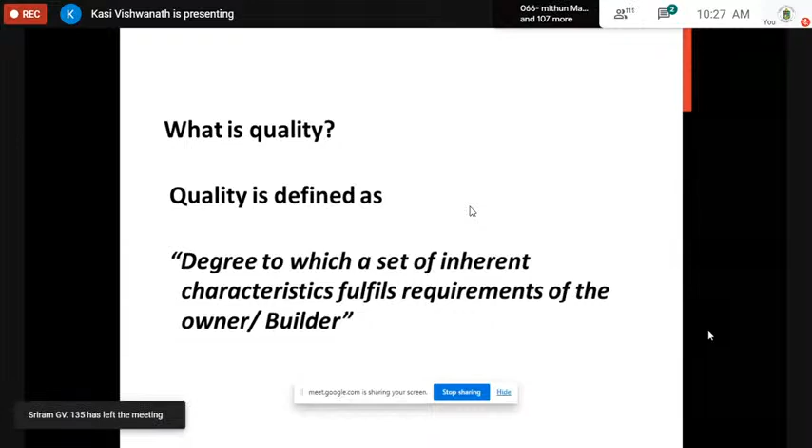Now, what is degree? It refers to the level of satisfaction. If a customer is very happy, the quality is excellent. If he is okay, then it is good. And if he's not happy, obviously it is poor quality of construction. You decide what you want. If you want to make your customer delighted, you need to put in your best.

Now, we were talking about quality assurance. In my introduction, I was telling you something about quality assurance. What is this quality assurance? The whole world is going behind it. As I said, quality control, I will explain what quality control is also. But quality control has gone into the shade now. It has become extinct.

We should not even talk about quality control because it does a post-mortem approach. It just talks about why the failure happened. Why are we concerned about it? Let us not allow a failure to happen. That is the spirit.

Now, what is quality assurance? It gives confidence to the owner, builder, architect. It's a proactive, preventive approach, and it predetermines the failure. Broad spectrum - quality assurance starts from the building materials suppliers till the finish and handover. It applies the quality monitoring system, which we'll discuss in the presentation.

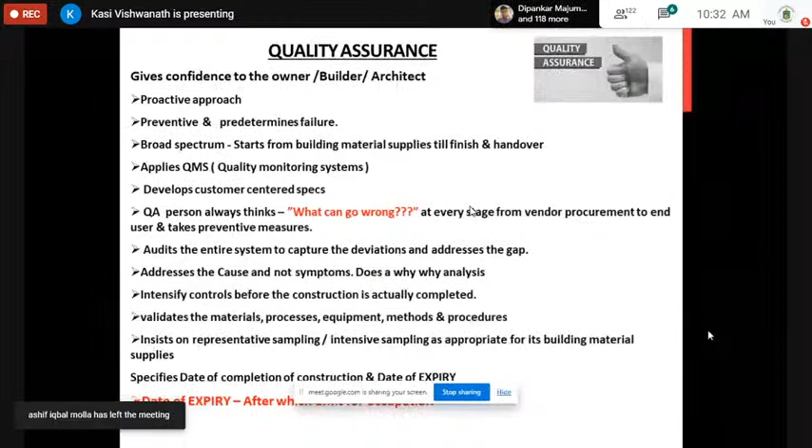It also specifies the date of completion of construction and date of expiry. When we make a medicine in pharmaceuticals, they give the date of manufacturing, they also give a date of expiry. Why can't we do that? Can we give a date of expiry after which the occupant should vacate the building? That is the kind of spirit I expect from our next generation civil engineers.

Now coming to quality control, as I said, they will just test the materials, give the results, and go away. As you can see, Japan has eliminated the QC approach several years back. The routine analysis of building construction materials - they do only the routine analysis, checking whether it is as per the specifications or not, and they maintain records.

It's a very reactive approach. On the other hand, quality assurance has a proactive approach. Quality control has a reactive approach. Quality assurance addresses the cause. Quality control addresses the symptoms - it's too late. QC persons will only report what went wrong. It reports the construction results, not bothered about the completion of the project. They are not bothered about it. They don't foresee the risk.

They'll just construct it, and on that day, if the results are okay, that's all - they don't foresee any risk. That is not the job. We'll test the water - if you say you test the water before construction, they will test it and give the results. If it fails, they'll say, sorry sir, I can't do anything in the field, it has failed, so you replace it with some other water. But where do you go for other water?

We'll test the iron quality used for construction - the strength and all - and then they'll give you the results. And in between, what happens is the supplier will give good iron quality, and the next lot may not be of that standard. And that is how big foundations all collapse. Now we test the quality of concrete - they will say, I have used this particular standard, but who knows whether that standard will serve the intended purpose or not.

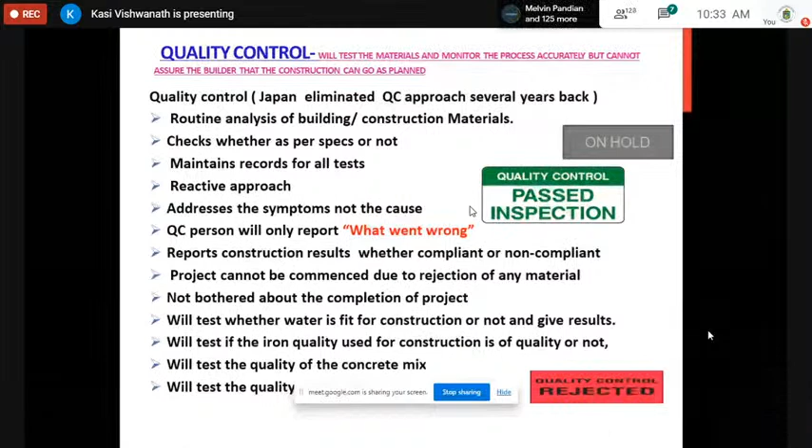Now coming to this quality management system, called QMS, I was talking about ISO 9001:2015, which many world-class construction companies like Hindustan Construction and Larsen & Toubro are all certified to. What does the standard say? The standard clearly says you need to have quality assurance. That is right, that is fine.

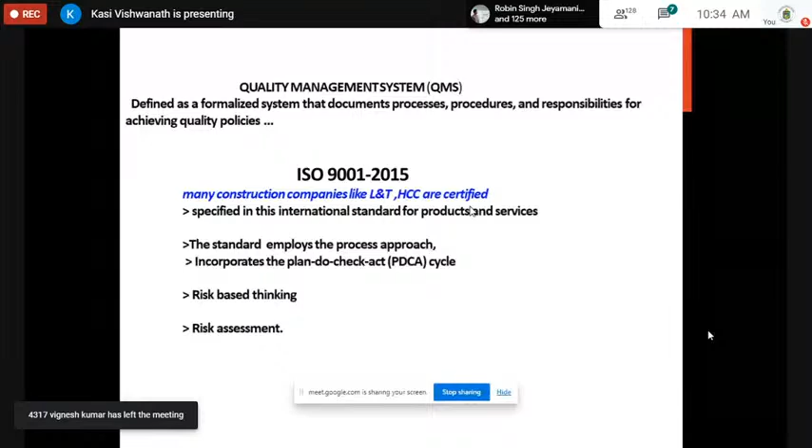But you also need to have risk-based thinking - a risk assessment needs to be done. Now, quality assurance assesses the risk from start to finish. As I said, sitting in a room with their experts, they do a brainstorming. From start to finish - raw building materials to the final construction - the criticality in the construction process, the probable occurrence of various failures, the current detection levels - they are all worked out with the entire team to evaluate what can go wrong. That is the philosophy.

Quality assurance will simply keep talking about this - what can go wrong in every step of the construction. And they keep on taking preventive measures, not corrective measures.

It's only preventive measures. And who can do it? It is not written in any books. You will not find quality assurance in any of the civil engineering syllabus or in any of your books or standards. It is just an experience.

All experts sit together, right from the workman, construction workman, to the top man. They do a brainstorming on what can go wrong in the foundation, what can go wrong in the entire process, not just now but even several years later.

So quality assurance is a greater accountability, assuring that the required building would be constructed as per the customer requirement and handed over in time. Quality assurance needs to be highly proactive and do a thorough risk analysis, and they should understand how to do that.

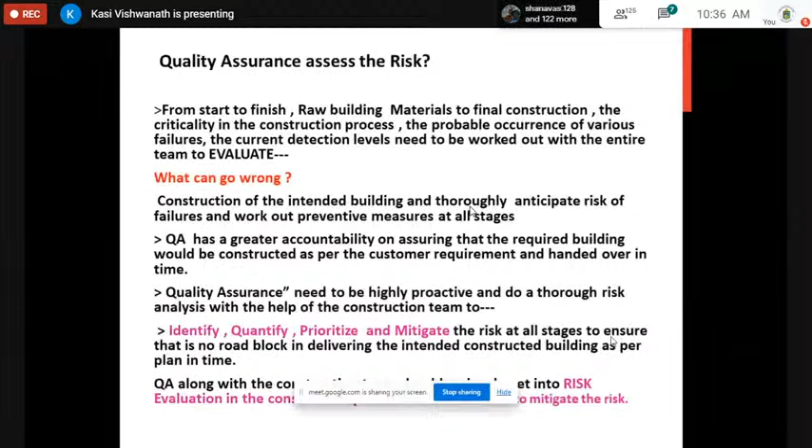What is the concept of quality assurance? As I have already explained, it is preventing mistakes. There's no use crying after the building collapses. They don't permit that. Everything is done even before the project is commenced - preventing mistakes and defects, foreseeing the risk involved in construction operations.

Quality in a construction process, how? The planned and systematic activities implemented in a quality system so that quality requirements for the construction and its completion will be fulfilled. That is their objective - to ensure all quality requirements for the construction and its completion are fulfilled.

QA services are primarily used by owners and developers. The owners use QA services to evaluate how a contractor is achieving specified conditions and design standards. QA is either measured before a project begins or while a building is undergoing construction. QA has no role after the construction is complete.

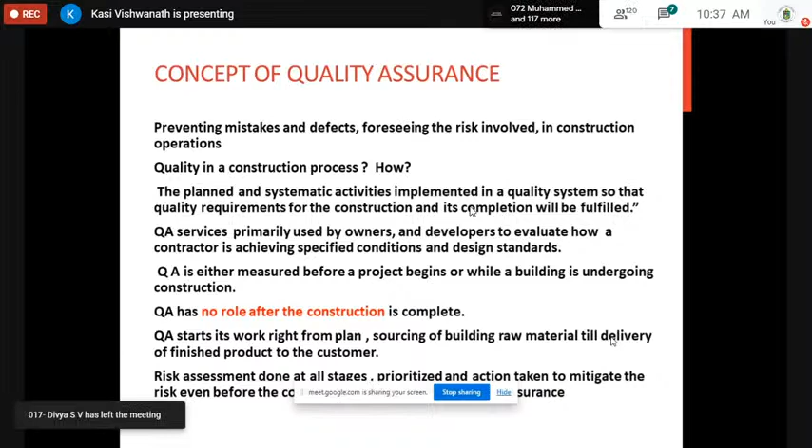Quality assurance starts its work right from planning, sourcing of building raw materials, till the delivery of the finished product or the delivery of the constructed house to the customer. A risk assessment is done at all stages.

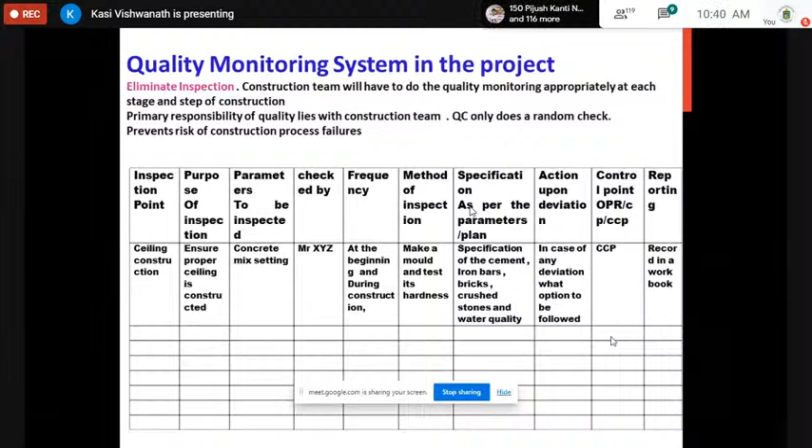Now, what is the key to quality assurance? Be proactive and conduct a risk evaluation through failure mode effect analysis. We were talking about how to evaluate the risk. There's a beautiful table called FMEA.

The whole world does it. In fact, for the Mangalyaan, our unmanned spacecraft that landed on Mars, when it successfully landed, the director of the space agency came out and said we were very successful because we did a lot of failure mode effect analysis. So to that extent, it has got a very high significance. Why not you all learn?

I even, during my discussion with Professor Gokul sir, told him that we'll conduct a workshop in your institution, and actually do a workshop with failure mode effect analysis for any construction work, for any project work. You will see it will be done with your help. You all will be there, and we'll conduct a workshop which will be very useful for you, and you can do the same thing when you're employed elsewhere.

QA always works on what can go wrong, I've already told about it. The risk is evaluated at all steps, starting from the design to finish. Even before the starting of the project, the risk is identified based on severity.

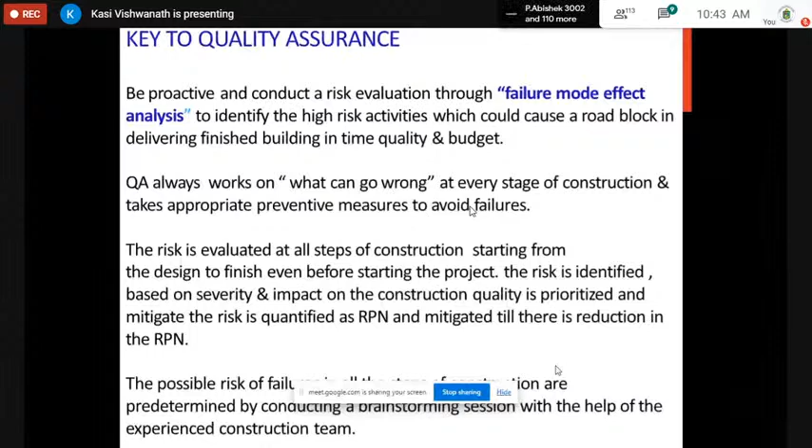Now, I was talking about disasters. Let us also have a look at this: 10 of the most shocking construction failures in the world. The root cause was determined after the damage was done. No use. These causes, what you're going to see now on the presentation, could have been captured during the risk analysis. But risk analysis was not done.

For example, in Quebec City Bridge in 1907, it collapsed because the main cantilever collapsed. Chicago Crib Fire, January 1909, it collapsed because a temporary dormitory crib constructed of wood and brick caught fire. St. Francis Dam, March 1928, collapsed because defective foundations, not the dam design, were to blame for the collapse.

Banqiao reservoir dam in 1975 collapsed, caused by failure of the dam's sluice gate during typhoon Nina, wrongly designed without proper validation. My goodness. Hurricane Katrina, you all know about it. New Orleans levee system, August 2005, collapsed because it was installed at a depth of 17 feet instead of the initially suggested depth of 31 to 46 feet. Who did the risk analysis?

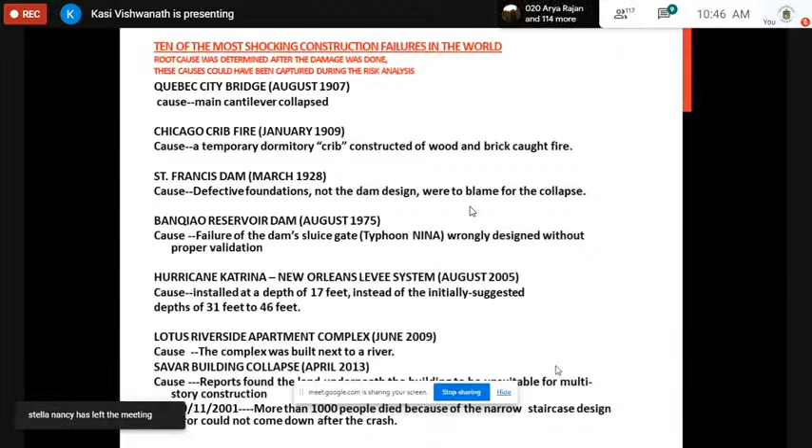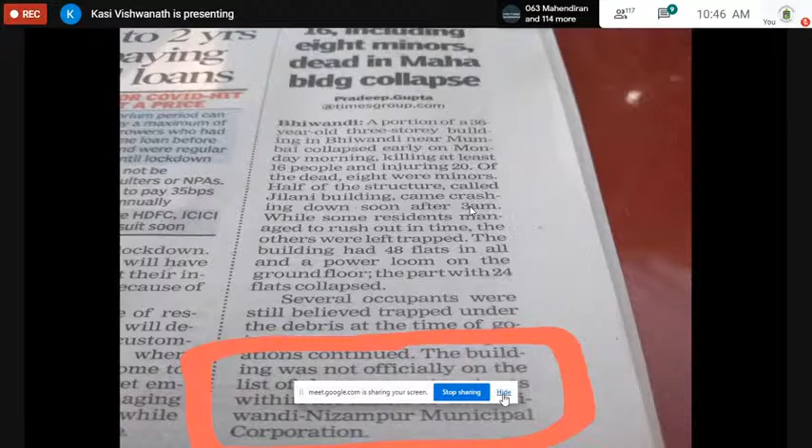Recently, this week, in Maharashtra, a building collapsed. The building was not officially on the list of danger, not declared as a dangerous or risk-prone building. It was not officially on the list of dangerous structures within the limits of the Bhiwandi Nizampur Municipal Corporation. Why has this happened?

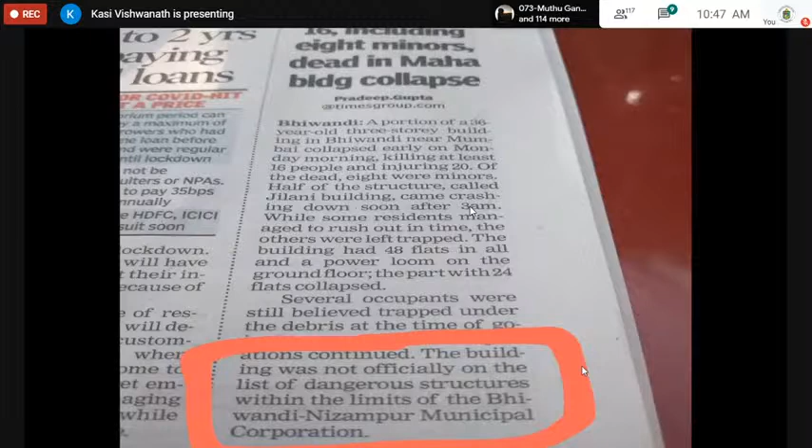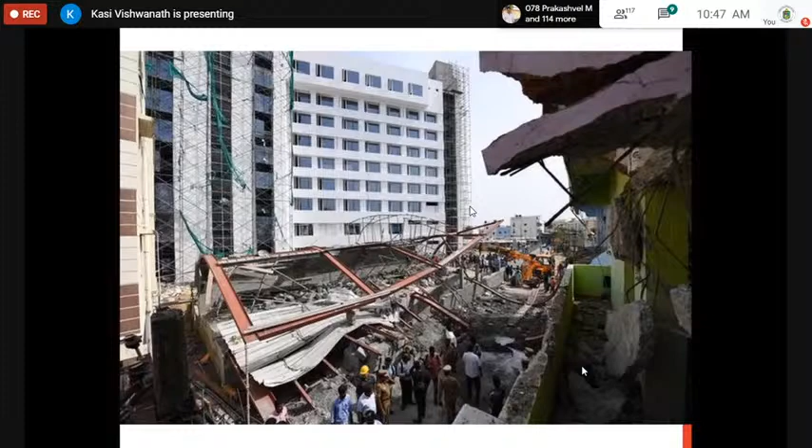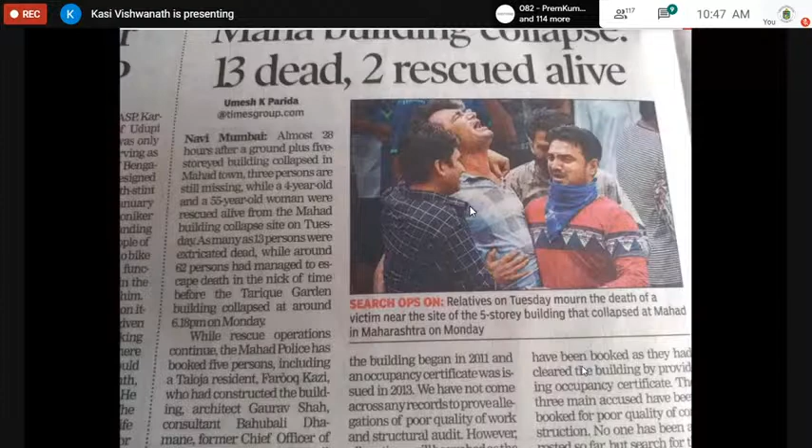We have got a good syllabus, top engineering colleges. We learned a lot of civil engineering techniques, we get gold medals. But what happens when these kinds of incidents happen?

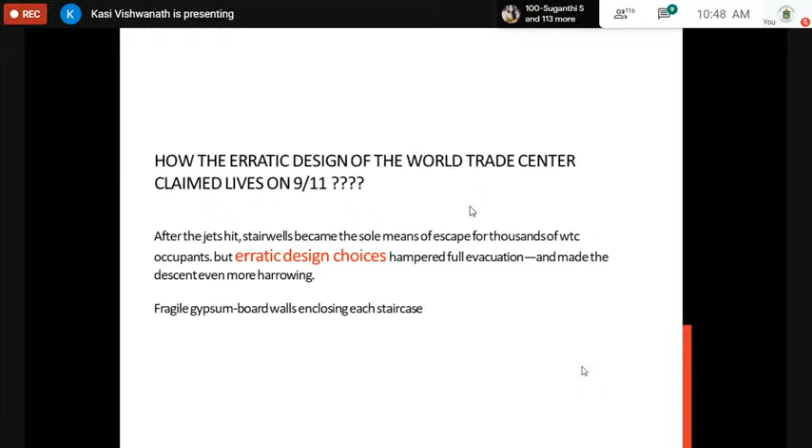I was just telling about the World Trade Center. After the jets hit, stairwells became the sole means of escape for thousands of occupants, but erratic design choices were the issue. They did a root cause analysis and found this was the reason. Had they made the staircase a little wider, as per the design, we could have saved at least 1,000 people.

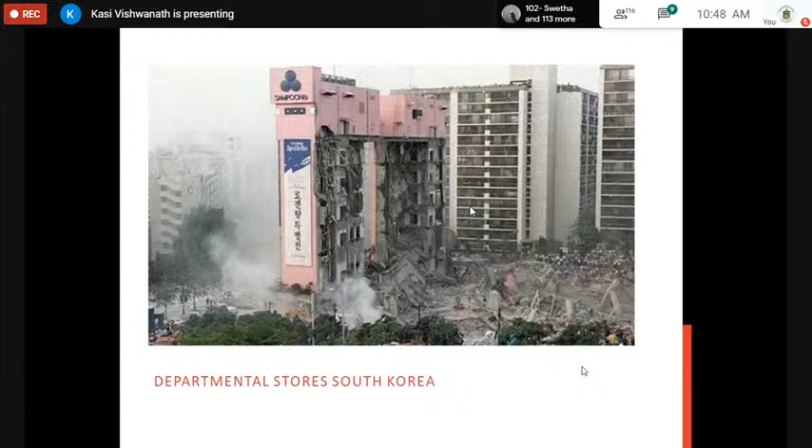This is the departmental store in South Korea - it's all poor construction, nothing else. Now let us look at how to evaluate the risk.

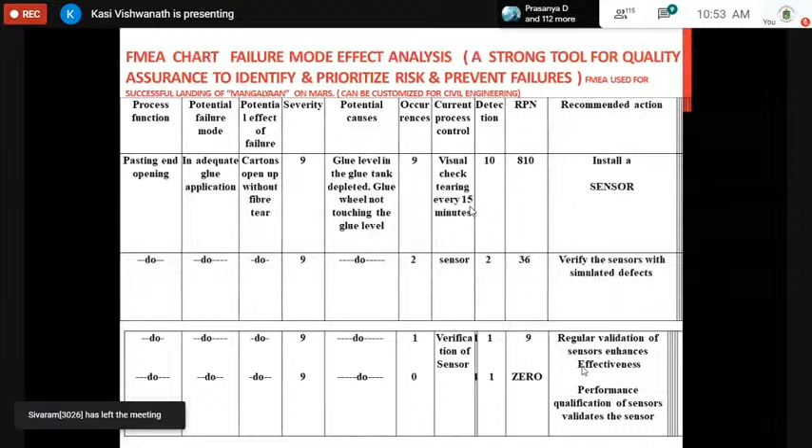So all I'm trying to say is there are a lot of beautiful methods to ensure that nothing goes wrong, no failures. Why not we learn all that? Failure mode, as I've already explained, is a tool to identify, quantify, and prioritize the risk within a process before constructing and building, and then track actions to mitigate the risk.

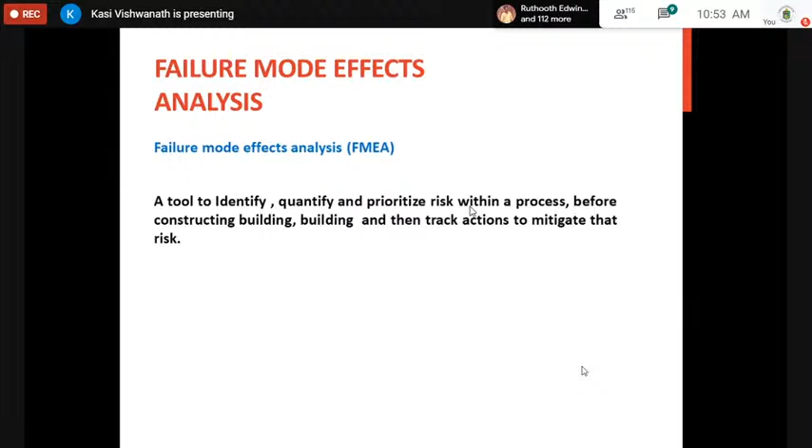Now, having said all that, let me spend a minute on what is Six Sigma. Six Sigma, getting a master black belt. If you, with all your valuable BE and ME degrees in civil engineering, learn about Six Sigma, your value is appreciated 100 times. Why 100 times? 1,000 times. If you say I'm a BE or ME with a Six Sigma black belt, you see how much your value gets appreciated.

I don't say your B.Tech, BE, or ME aren't valuable. They are basics, a must. But this will keep you on the launching pad. You are sitting in a rocket to go up, and you go into space.

So what is there in Six Sigma? Six Sigma helps you in problem solving. The efficiency is 99.9999%. If a company is working on a Six Sigma philosophy, it permits only 3.4 defects per million opportunities. If we have done a million activities, there could be only 3.4 defects.

That's it. Now we are talking about Lean Sigma. Lean Sigma is also very valuable. Just like Six Sigma, there's a Lean Sigma, which simply reduces the cost of production, cost of manufacturing. It reduces the waste. So what happens? You are able to give a better product economically to the customer. There won't be any wastage. The company will be able to manufacture the product without any non-value addition, without wastage, without producing defects. That is the beauty of Lean Sigma.

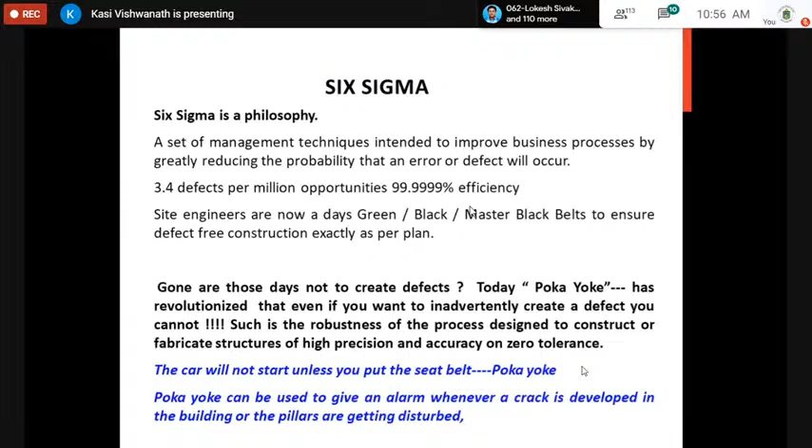So I have already explained the FMEA part of it. In construction safety management, for the process of construction activities, how to do the FMEA is very simple. You first list down all the activities from A to Z, from foundation till the end. In one foundation itself, a team did brainstorming and found 181 activities, actually 180 steps in the foundation itself, including sub-steps. List them all.

Work on the severity, what impact it will have on the finished building. Work and also find out the possible occurrence - if there is a failure in this particular activity, what is the possibility of the failure occurring? And also list out how strong are your detection controls. Is it manual, or is it left to good luck? Or have you got a system?

If your foundation is crumbling and giving a small shake-up, are you getting some signals? Have you got a small device which will find out something is going wrong in the foundation? Even after 25, 30, even 50 years after the building has been erected, you should have a system to give a beep sound - yes, the strength of the construction, the foundation is getting weaker and there are cracks developing.

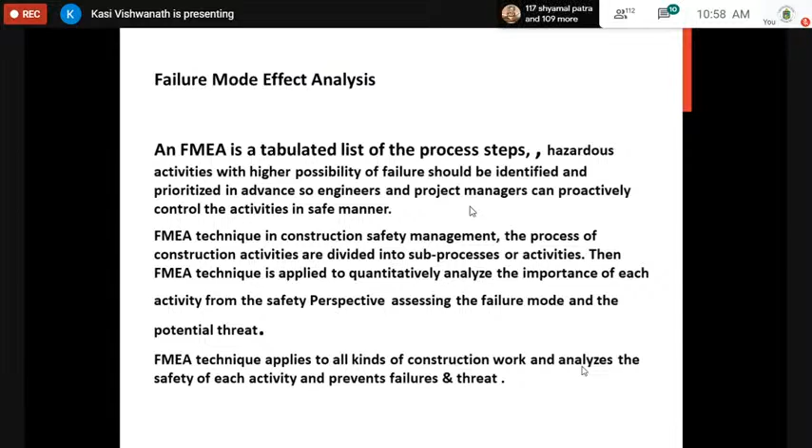So all this is nothing but you are foreseeing the risk and putting the preventive measures in place. We can work on it. I promise you, in a small workshop, whenever the pandemic situation eases out, I'm sure I'll help you out.

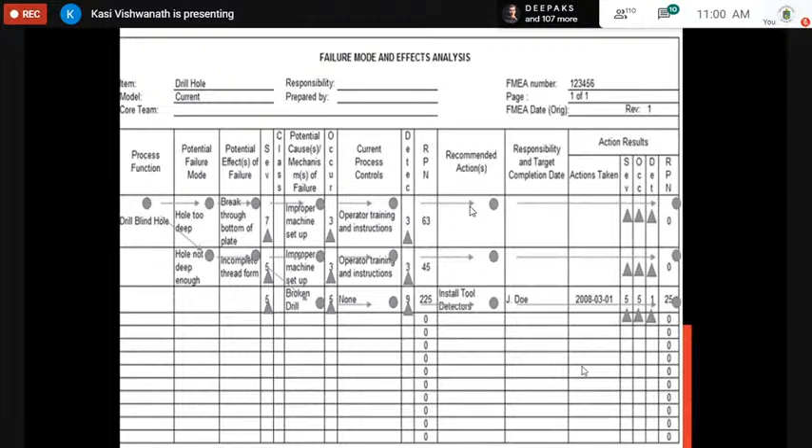This is the objective of failure mode effect analysis: keep on reducing the risk till it comes to zero. But a good risk level is, if it's below 50, the whole world accepts it. There's not much danger if the risk number comes below 50.

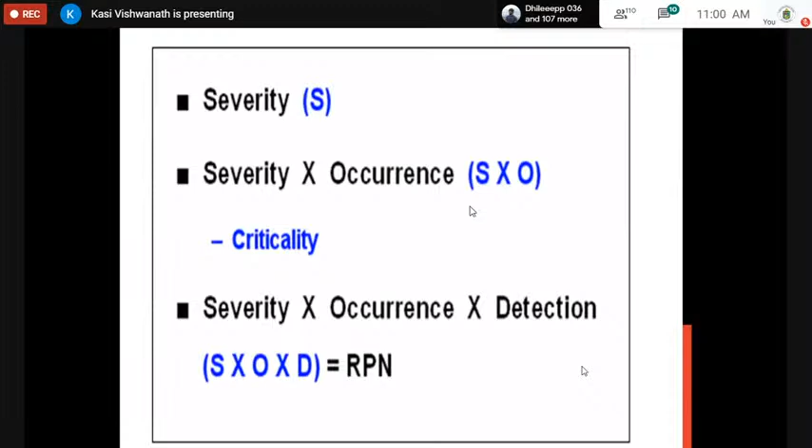Now this is just a template, I have already told you this. The severity into occurrence is equal to criticality. The severity into occurrence into detection gives the risk priority number. I've already explained the failure mode effect analysis.

If you look at it, the highest risk is 1000 RPN. The highest risk - if your FMEA, failure mode effect analysis, shows 1000 - that means there's a disaster. You have to immediately attack on it.

Above 500, there's a very high risk. The moderate risk is around 250 to 300, and the low risk is 40, and zero defect is no risk at all - the spaceship can take off. Normally for rockets, they go for zero defect. Only unless there is zero risk does the countdown start.

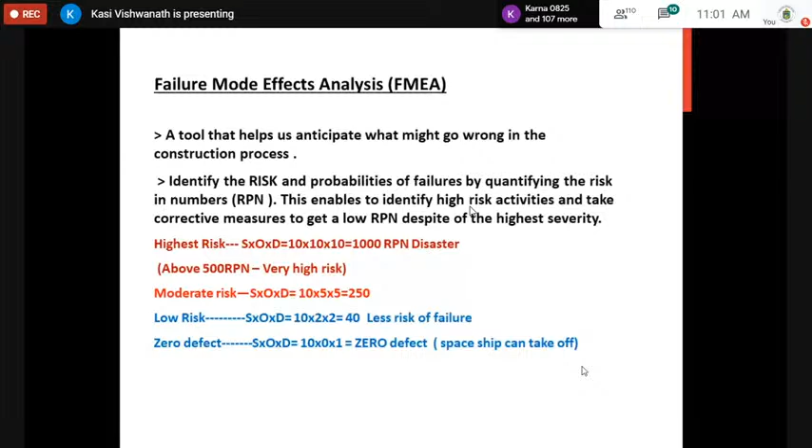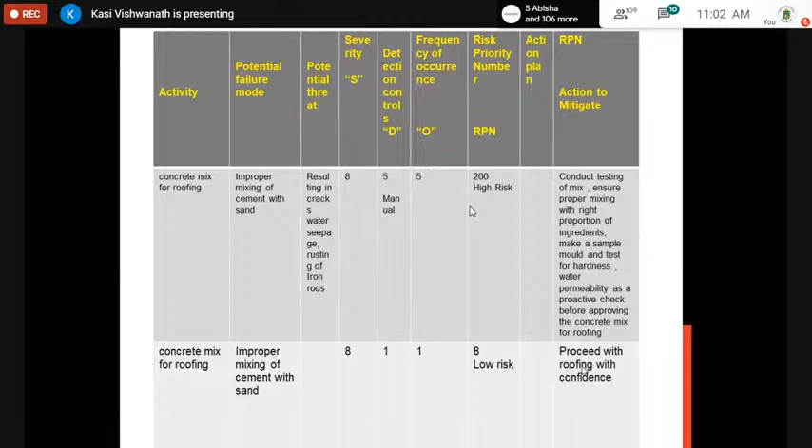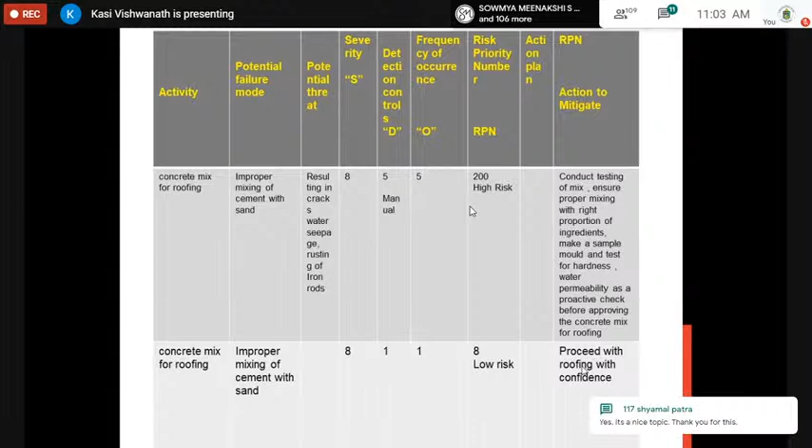So your detection controls, you worked on it to ensure that this will not give away. The mix will be perfect as per the plan, and the occurrences have also come down. The risk from 200 has come down to 8. You can proceed with confidence.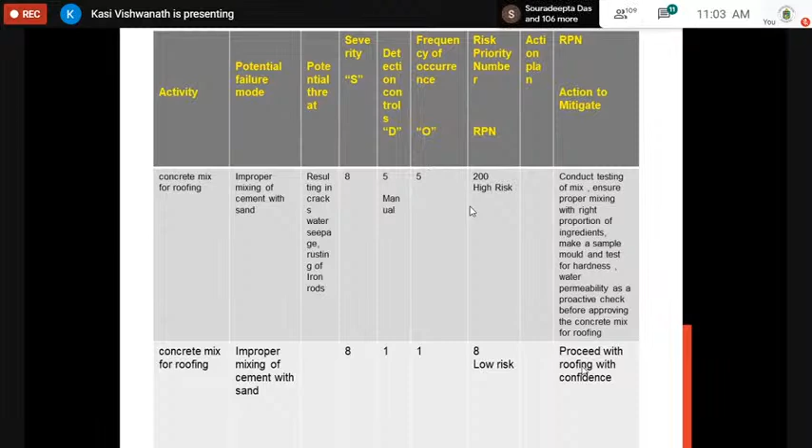This is the thumb rule I've already explained, because time is a factor. As I said, these are all the severity levels: very low, moderate, high. This is a rating on a scale of 1 to 10. If your severity is very low, you give a number of 1. If moderate, give 5. If very high, you can give 10.

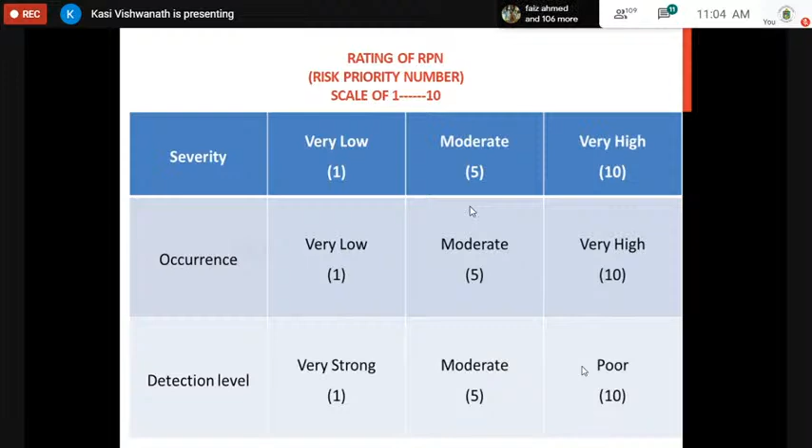Occurrence, same thing: very low, moderate, and high. If it's high, you give 10. If very low, give 1. Detection level, again, if the risk is low, your detections are strong, and risk is low, you give 1. If you don't have a proper detection level, only manual, then risk is high, so it becomes 10. So this is the rating.

As I said earlier, the success of the Mangalyan satellite is due to the extensive FMEA carried out before the launch. The root cause for any problem is always in the 5 M's.

Any cause for any disaster is because of the 5 M's. One is material related, or method related, or machine related, or man related, or mother nature related. You need to have a complete plan and think about all these 5 M's, because these are the 5 M's which contribute to failures: man related, material related, method related, machine related, or mother nature.

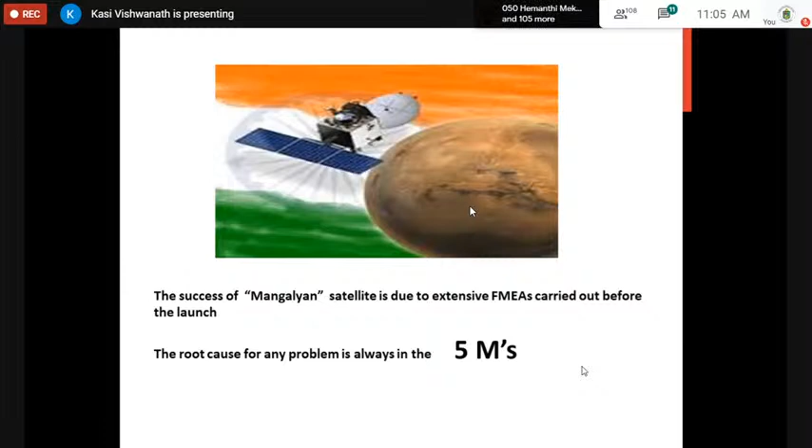Now, why good construction practices? I don't have to spend much time, you are masters in this. You have got very good professors and a beautiful institution to teach all that. But still, I'll go through the best construction practices.

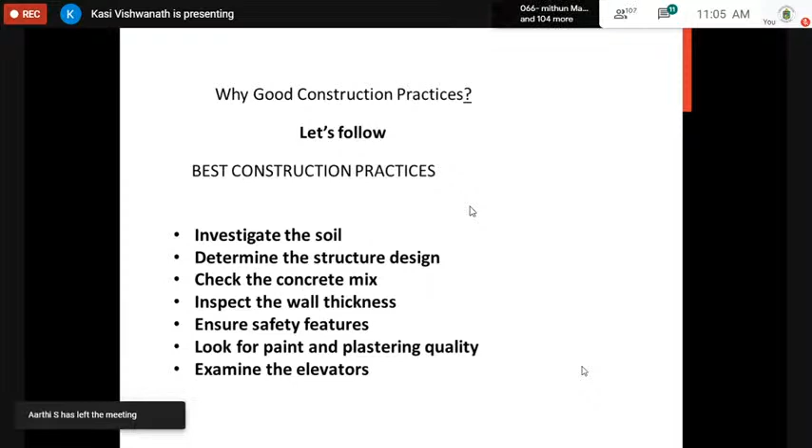Investigate the soil, determine the structure design, check the concrete mix, inspect the wall thickness, ensure safety features, look for paint and plastering quality, examine the elevators. These are the good construction objectives to prevent or eliminate error at each stage of construction. I'm only talking about failures. We have done a lot of good constructions and they have collapsed also.

Now there's a small shift. We are trying to change our thought process. You need to prevent and eliminate an error by foreseeing the risk. So identify the possible risk and potential threat on the constructed building or bridge, to take all necessary precautions to ensure that we construct buildings of the required high quality and safety, to reduce disorder in the system of construction, to show concern for the constructed building and the people, and to develop leadership qualities with an attitude for quality.

Whenever you do a brainstorming, you should have everyone, right from the labor to the top project head, all of them should be there to do a brainstorming. We don't know, you may get a golden idea from the man who is carrying the bricks.

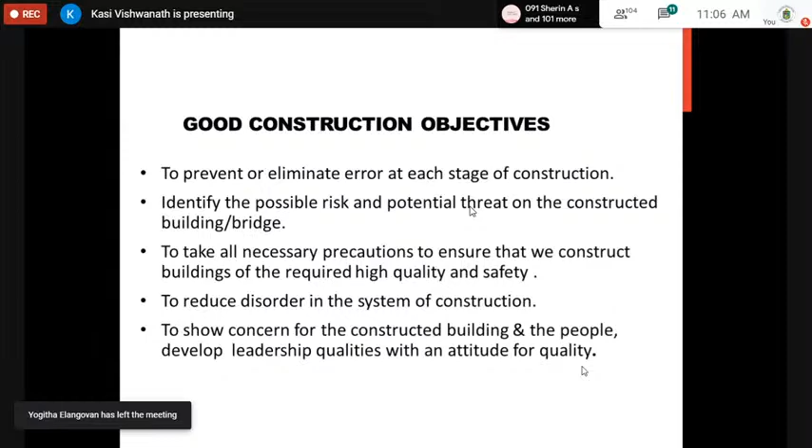International standards: these are international standards, the American Society for Testing and Materials. I hope you're aware of this. Euro codes, IS codes, BS codes. These codes describe details of standard methods of testing, procedures, and methods of concrete masonry.

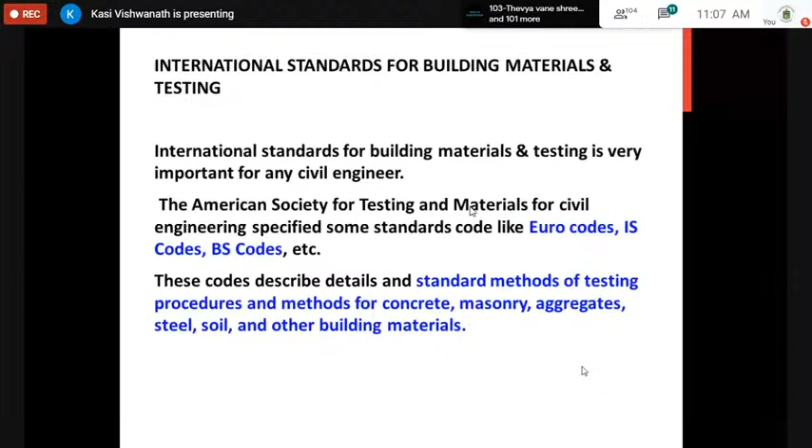But all this is fine, you need to find out. You don't want the best material, you want an appropriate material for the intended purpose. I don't need the best material, the world's best material. I only need material which will serve my purpose, where the buildings can be safe and it will stand for the number of years what you have planned.

So some of the standards: ASTM, Canadian standards, European standards, British standards, Indian standards. Now all these standards are going for risk evaluation. Please understand, all these standards, they want risk evaluation to be done. That is the reason why I'm focusing on this.

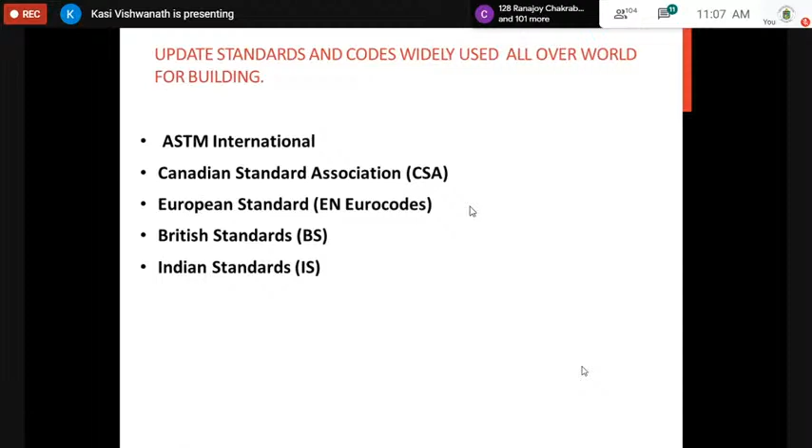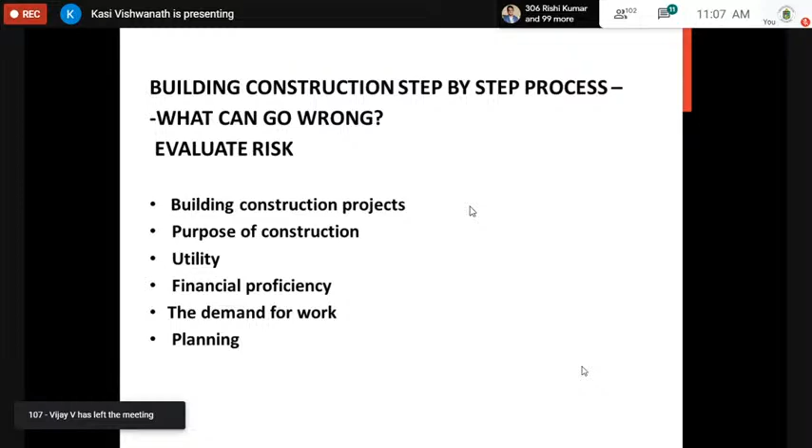Building construction, step-by-step process: what can go wrong? Evaluate the risk. Building construction project: purpose of construction, utility, financial proficiency, the demand for work, planning. What can go wrong? You need to apply your quality assurance and risk evaluation.

They check cement, best for house construction. You are not checking the best of quality, best of the grade, or from a very good manufacturing company. You need to check whether it is the best for the house construction.

For calculations, you all know about it, you are civil engineers. The total load on the columns, beam, slab - we must know about various loads coming on the column. You need to verify. Generally, column, beam, and slab arrangement is seen in the frame type of structures.

Load is transferred slab to beam, beam to column, and ultimately reaching the foundation of the building. All that I need not say, because I know you

learn all that from your gurus, from your books, from your beautiful syllabus. We have got a beautiful engineering college here, and our syllabus is one of the best in the world. Only thing is, they need to be a little quality focused. That is my request.

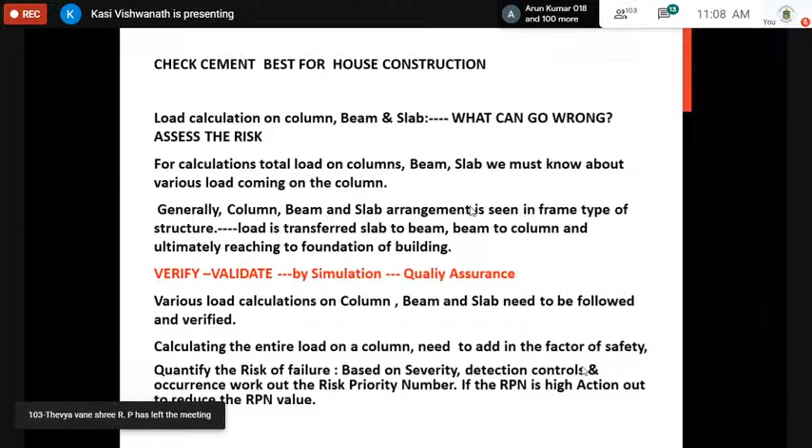Quantify the risk level and all that I have already discussed. We are quickly going ahead. Now, which is the most appropriate cement for house construction, for your type of house construction, depending upon your locality where the house is going to be constructed. Not the best, but what is appropriate.

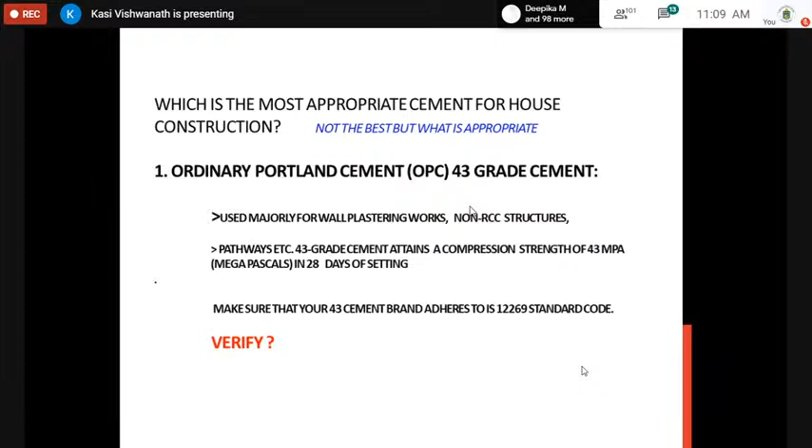OPC 43 grade cement, it might be the best, but whether it is serving your purpose, you need to prove it. You need to verify before you use that. Or it is OPC instant plugging mortars. You all know about the characteristics, that they are for fast-paced construction in which the initial strength needs to be achieved very quickly. Validate it, no.

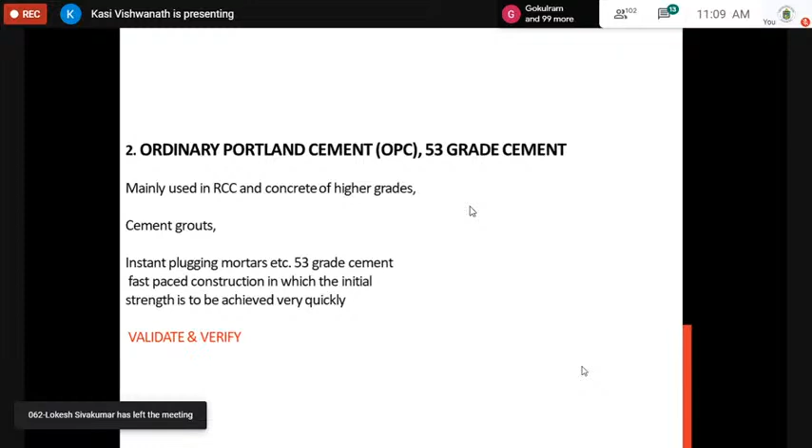You need to make a sample to verify whether the initial strength is achieved where you want it, whether it is really achieving that initial strength very quickly. You need to verify and validate before you use materials like this. And if you don't verify, you will face disaster.

The same thing with this, Portland slag cement, same thing. Excellent corrosion resistance might be claimed. Do it, find out whether it really serves the purpose. Who knows? The slag cement you're going to get may not have all these characteristics. Make a sample, test it, ensure that it has got the right kind of

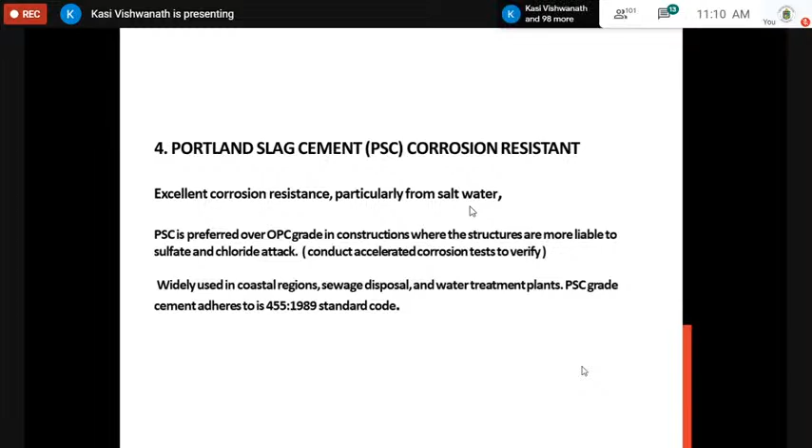characteristics before you use it to avoid failures. No failures. If at all you feel there is a failure, cut open and find out where the failure can happen and take preventive measures. Don't leave it just like that. The same thing with white cement.

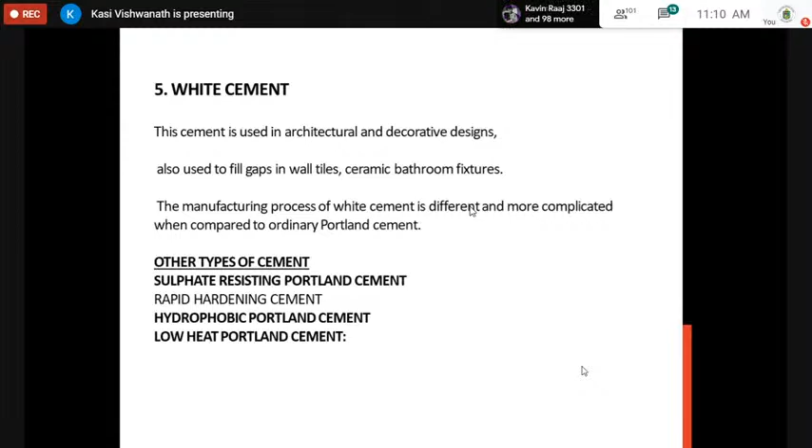Where you should evaluate the risk - suppose you have got some set of labor and they stop coming. Will you stop construction? Will you get new labor? Who knows whether they'll work to your satisfaction or not?

My dear friends, everywhere you have to foresee the risk. If you don't foresee the risk and you keep on working mechanically, the result is going to be very dangerous. It's going to be a disaster.

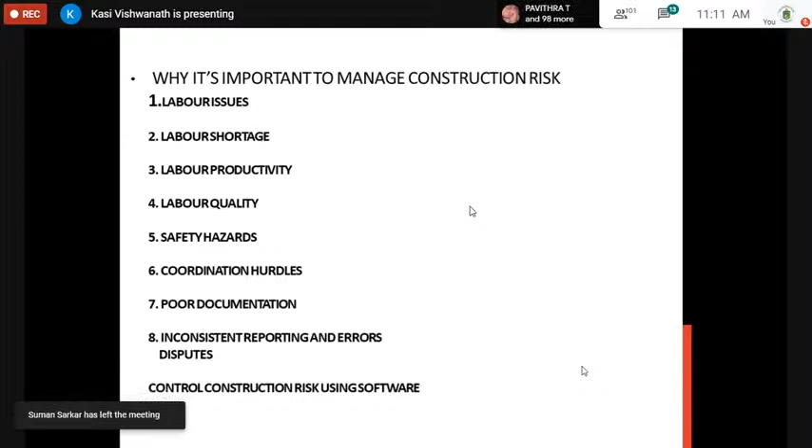Think for a while, call for a brainstorming, call all the people and try to analyze and foresee what risk we could face in soil testing and report analysis, or while demolition of the old structure. You are the right person. You need to think about it and take preventive measures.

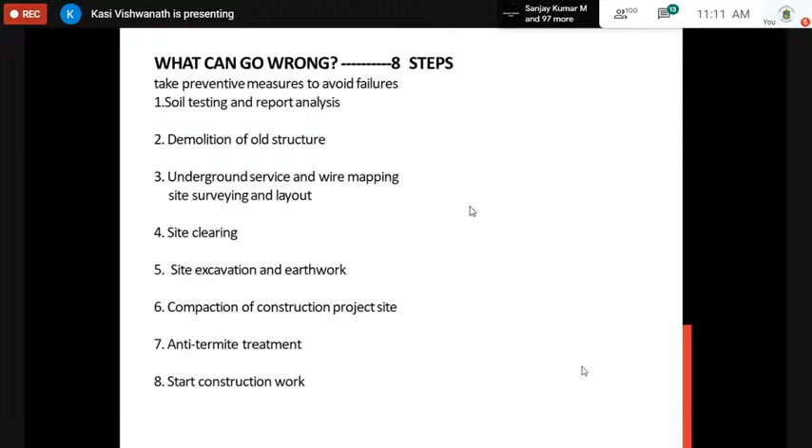Soil testing and report analysis - analyze what can go wrong. What can go wrong, not what went wrong. Don't do that, it's a sheer waste. If you start talking about what went wrong, it is just like doing a postmortem.

Soil testing is essential before planning and designing any construction project. Without knowing the properties of the soil, we cannot design any structure. Soil geotechnical investigation is carried out. You need to find out what is the risk. If you feel that there is no risk, go ahead.

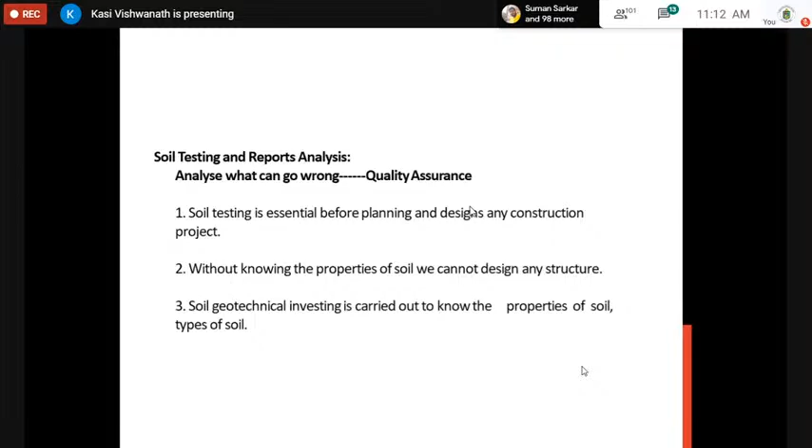Demolition of old structure, what can happen? What can go wrong? The demolition of old structure is important in construction site preparation work. Prepare a plan to demolish the old structure with the help of a demolition team. Demolition planning must identify which structure on the site needs to be demolished. Structures on site which require repairs versus demolition - you need to differentiate. Systematic planning, identify hazards, ensure safe disposal of materials, comply with legislation requirements.

Your building is half done, and there might be a roadblock by the legislation committee. You need to be very careful. You should not take any risk in that aspect.

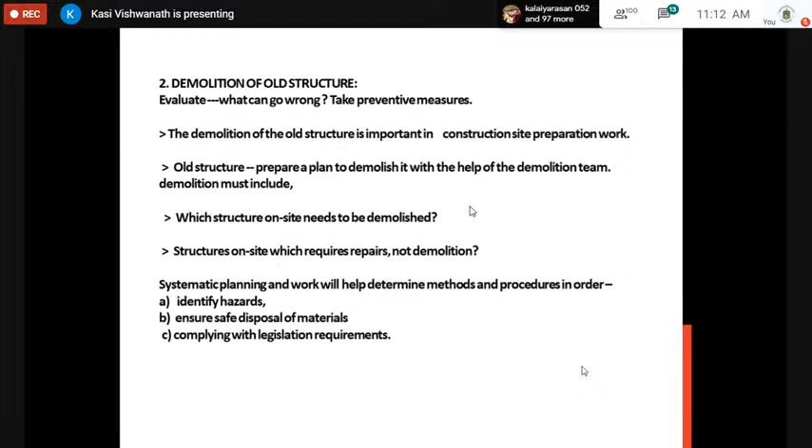The site clearing, same thing. Something might go wrong, so you have to remove any underground wood, underbrush, trees, rocks to a distance. All this is very important. And this does not need any standard, does not need a BE or ME degree, or a doctorate degree for it. It's all brainstorming. Call all the people, sit together and brainstorm about what can go wrong, foresee the risk, and take action.

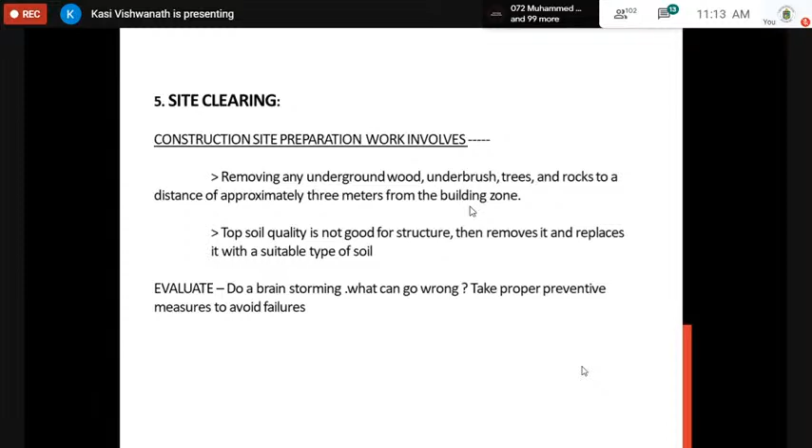Do a brainstorming. Site excavation and earthwork, same thing. Distance the soil. You are the best man, but we don't know what can happen. Call the people, call the nearby surrounding people and think, apply, not one man. When 25, 30 people all sit together and brainstorm, I'm sure the result would be excellent.

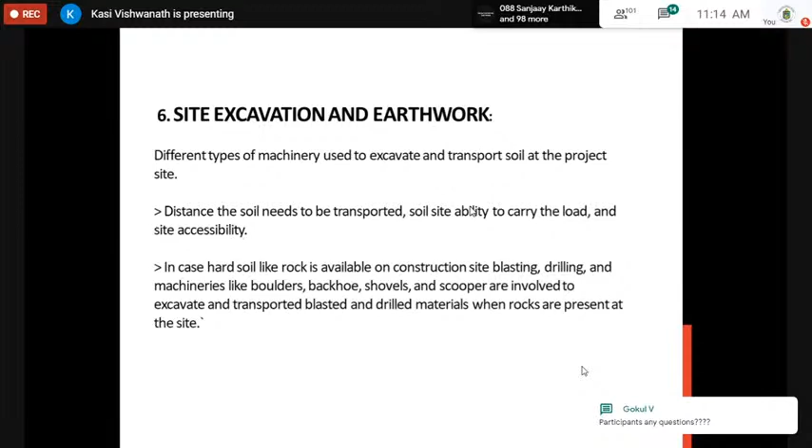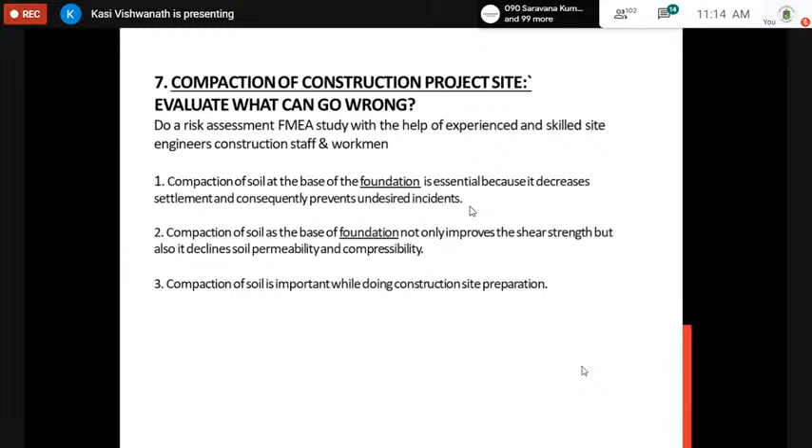In case of hard soil like rock available on a construction site, blasting, drilling and machineries like bulldozers, backhoes, shovels and scoopers are involved to excavate and transport the blasted and drilled materials when rocks are present at the site. This is the compaction stage. Here also we need to take appropriate preventive measures and foresee the risk. You all know about compaction of construction project sites and all that.

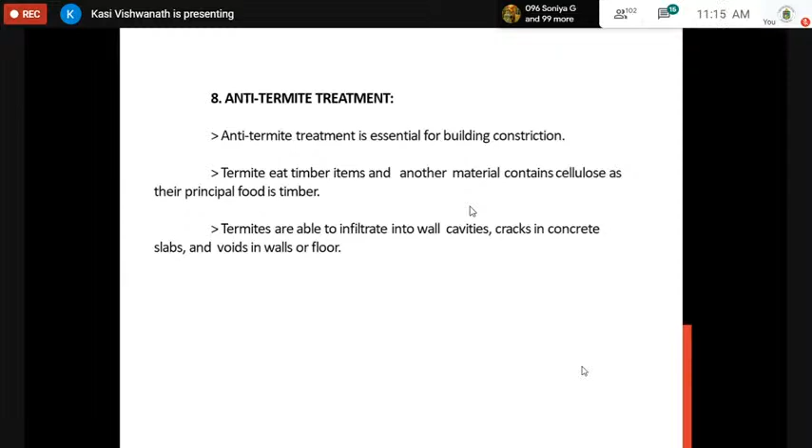Anti-termite treatment, you all know about it. This could be a total disaster if you don't do the treatment properly. Even before you start the project, you need to completely de-termite the soil also.

How to reduce pollution at the construction site? Again, adhere to the security norms and avoid dumping of material. You all know about it, but then try to foresee what I'm saying. All I'm trying to say is, don't ignore all this.

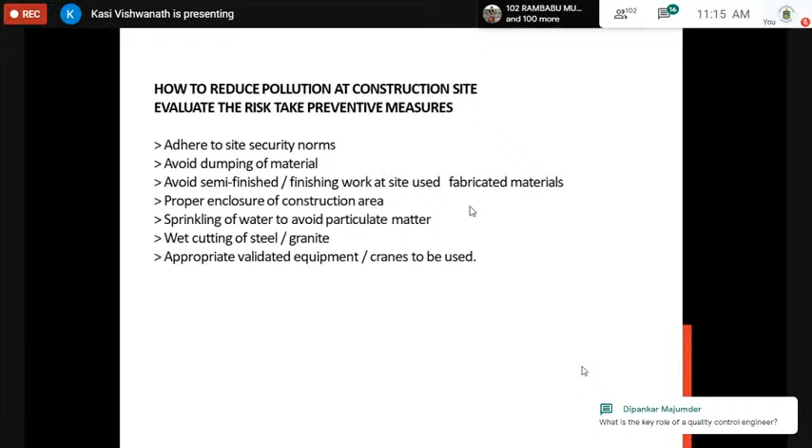Training. Now, if I look at some of the very good reputed construction companies, what they do in the morning is they will all wear their helmets and there'll be a group meeting. They'll wear all helmets and all that, and all of them will go and stand in front of the supervisor, and the supervisor will give them a briefing. The training is very important.

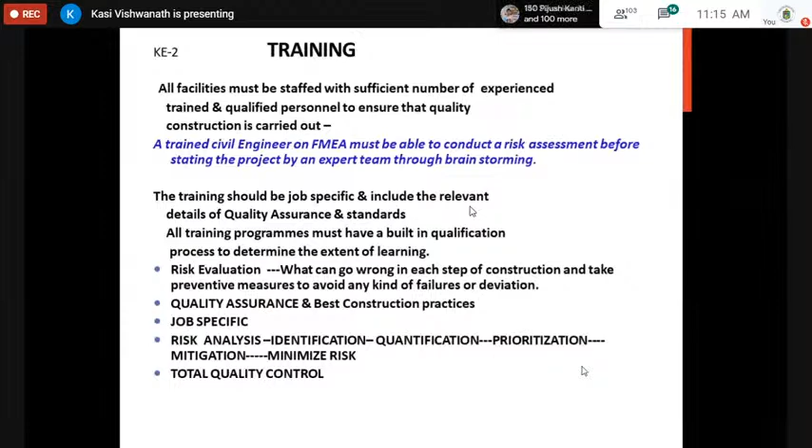A trained civil engineer on FMEA - suppose you learn FMEA, you learn the preventive measures at your college level, and when you become the project engineer, you will certainly ensure that all these things are practiced. Quality assurance and best construction practices, risk analysis is done.

Now, design, construction and installation. All new buildings and equipment should be designed to comply with the best construction procedures. And best construction practices are not taught in colleges or available in any standard. It is a passion and dedication that is collectively evolved through experience, skill, validation, simulation, and evaluating the failures even before starting the construction work.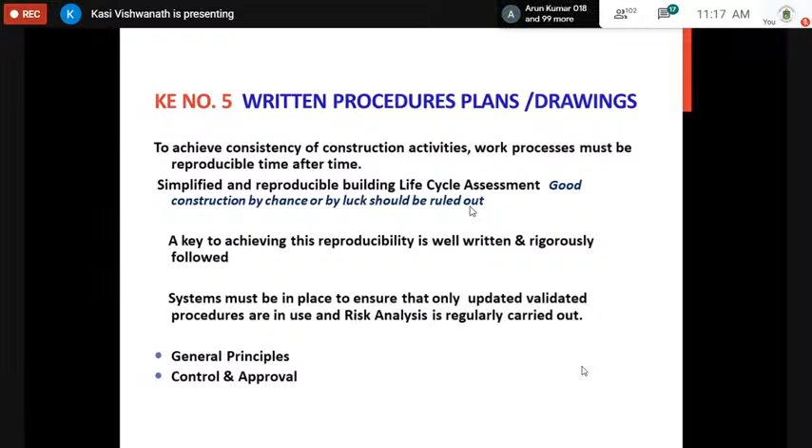The validation, of course - what is validation? It is just to find out whether it is serving your intended purpose. How to do validation? Do it by simulation. You make a sample mold or you verify it, but validation has to be done. Without validation, you cannot go to the next step. If at all there is a risk, only validation will eliminate the risk.

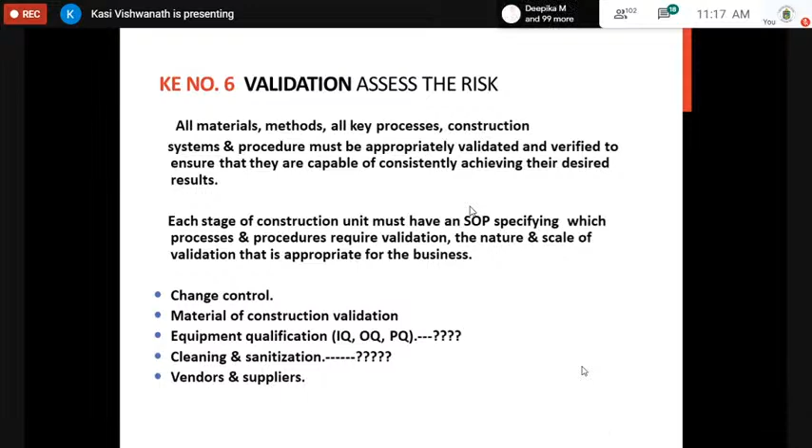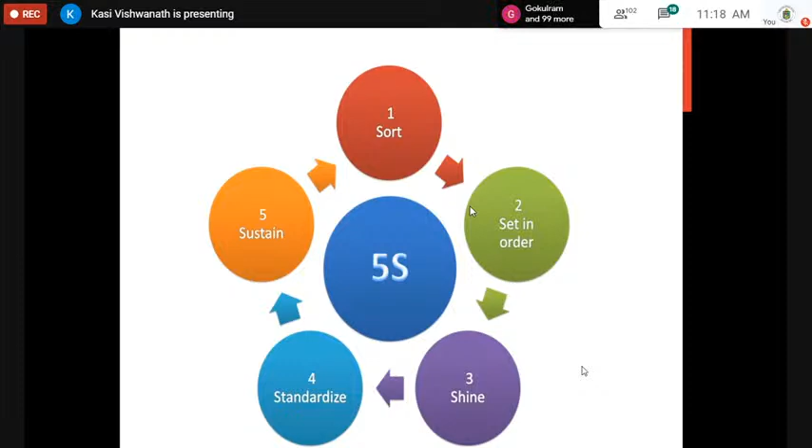Housekeeping, pest control is very important. Now, there is a housekeeping method called 5S. It's very important, and there is a separate course for it. It just takes an hour, but this is very important. You go to any industry - service, manufacturing, or construction - these 5 steps are very important: sorting out, setting in order, shine, standardize, and sustain. This is the order of the day. The whole world follows the 5S principles.

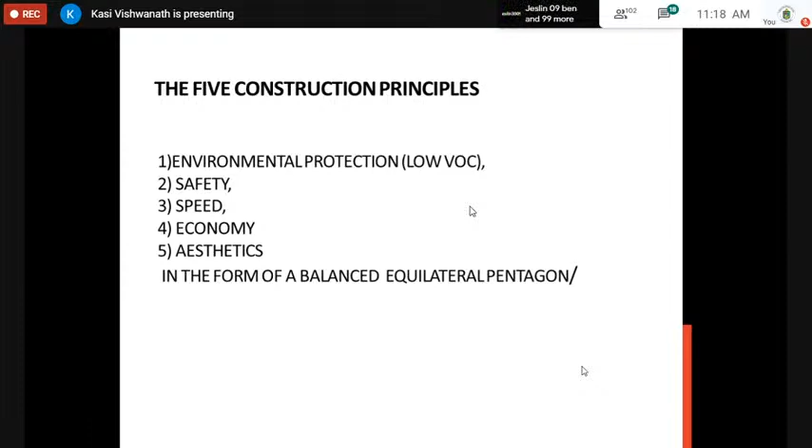Then the 5 construction principles are these: environmental protection, safety, speed, economy, aesthetics, and the quality assurance of construction materials, which I've already told about.

The quality assurance of construction materials in continuation - testing and inspection at the receiving end, and proper storage in the warehouse. All this is risk oriented. You need to store materials to avoid deterioration or damage during storage, and convey the quality specifications well in advance to avoid stockpiling, rejection, or mix-ups. All these steps, used appropriately, help ensure the right quality of incoming construction materials, which ultimately reflects in the final product of the company.

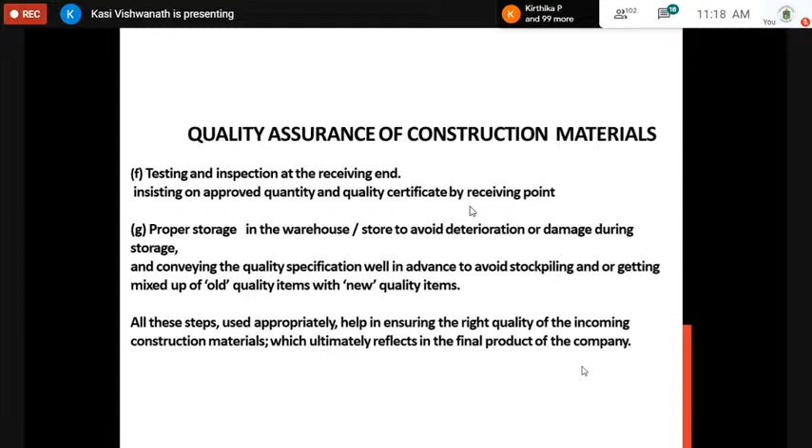Storage handling - same thing. Poor storage of cement causes cracks; improper storage causes cakes and spilling of concrete from corners and edges, deterioration in quality, reduction of strength of concrete, and unsmoothness. Poor storage of timber should be free from pests, and bricks should be stored away from water. All this has to be worked out. This is very important if you want to construct a building in a safe manner.

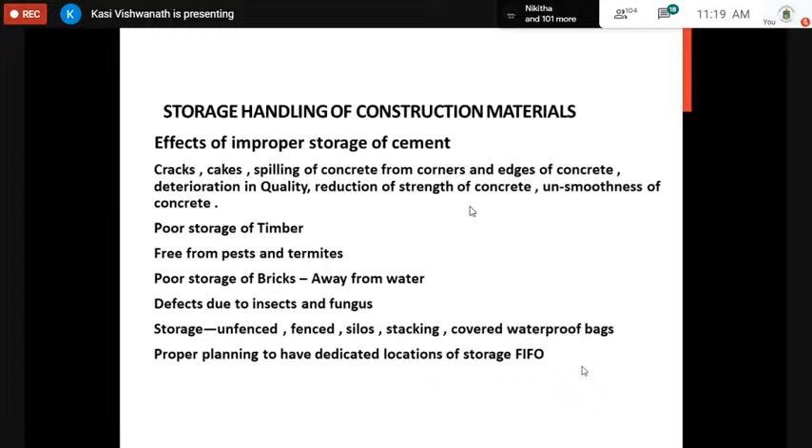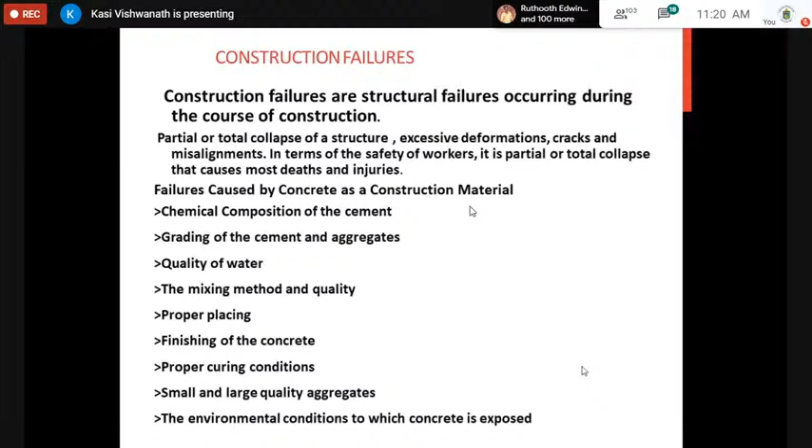These are the construction failures I want to share with you - I'm only talking about the problems, not the good things. Construction failures are structural failures occurring during construction: partial or total collapse of structure, excessive deformations, cracks, misalignments, and failures caused by concrete as a construction material - chemical composition of the cement, grading of the cement, quality of water, mixing method and quality, proper placing, finishing of the concrete, proper curing conditions. All these could result in failures. Have you worked out and foreseen all that? My entire presentation is focused on this.

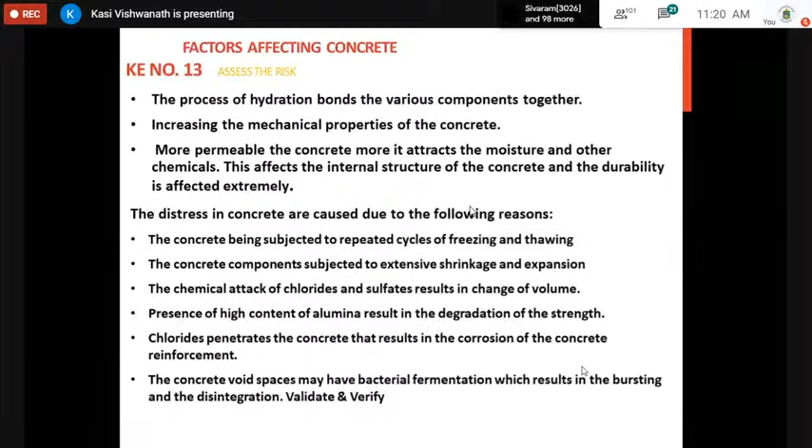These are the factors affecting concrete - you all know about it, but these are the factors: concrete subjected to repeated cycles of freezing and thawing, concrete subjected to extensive shrinkage, chemical attack of chlorides and sulfates, and presence of high content of alumina. You're aware of all this, but evaluate the risk when you start a project - not after or during construction. Work out these things which can happen. Have you taken adequate preventive measures to avoid these failures?

There are failures caused by masonry as a construction material - you all know about it, this is part of your syllabus and you are masters in this, but you need to foresee it: cracking during settlement issues, shrinkage and bending process, thermal expansion of masonry units, walls running in the same direction may undergo shortening, and lack of proper consideration in design and detailing of expansion and control joints. All this is part of that.

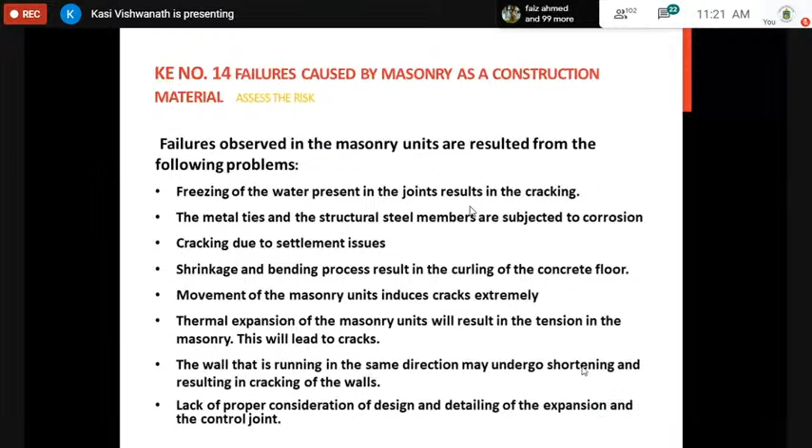We are talking about wood - the failures in wood: moisture content, density, splits, shakes, knots, checks. We have seen one of the failures happen because of poor quality of wood.

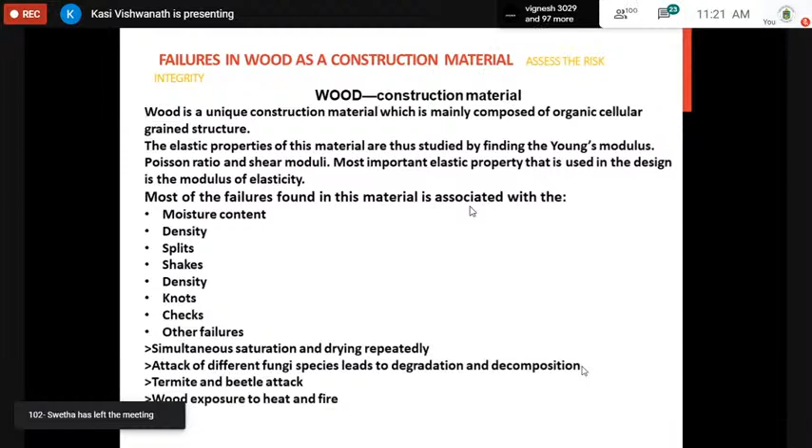So train the construction team to do a foolproof risk evaluation for the project. When you are yourself trained in this field, you will always foresee the risk. That is why I was requesting Professor Gokul sir to conduct a small workshop - it will be very useful when you pass out and join the construction industry or open your own construction business. Quality has to be assured before construction starts.

Now, what are the 5 R's? Robust specifications - you should have robust specifications. Relentless training and supervision - never ignore the training part of it. One man who doesn't know the job, if he does the wrong thing, you are finished - the whole thing goes haywire. So relentless training and supervision, risk evaluation, ruthless surprise audits.

That is why Indian civil engineers are valued - they are always there on the site. I have not heard of any civil engineer sitting in an AC room and enjoying. He's always there, whether it's raining, snowing, or scorching hot - you will still find our civil engineers standing over there. RERA is another very important regulatory compliance. Thank you.

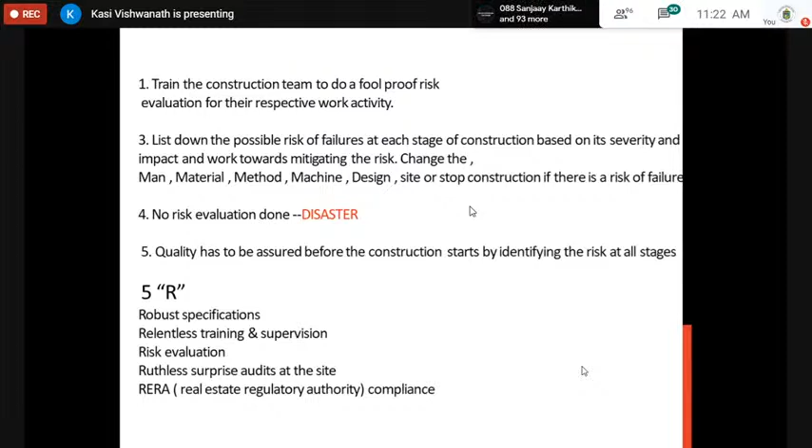Thank you, sir. Yes, sir. It's seriously an awesome presentation, sir. Participants, kindly know that sir has no contact with the civil department anywhere - he prepared this by his own, separately. He took around 3 weeks of time and prepared everything about civil engineering related to quality assurance and the problems normally occurring in the civil department. He analyzed everything on his own and did it perfectly. I didn't expect this much elaborate explanation in civil department - it's really an awesome presentation. Thank you so much, sir. Thanks a lot, and thanks to the participants who participated for the whole 1.5 hours.

Sir, some 2-3 questions are there. Can I ask, sir? Certainly, sir. Most welcome, sir, most welcome. Yeah, just.

What is the key role of a quality control engineer? Come again, sir. Please come again. What is the key role of a quality control engineer?

Right, very nice question. Quality control, as the name itself indicates, is a reactive process. What quality control people control means you are controlling during the receiving of the building raw materials or during the construction process. Their job is very limited. They will only ensure that the materials you are using are tested and within specifications. If they are not within specifications, or as per the required quality, they will reject it and go home. They will not do beyond that.